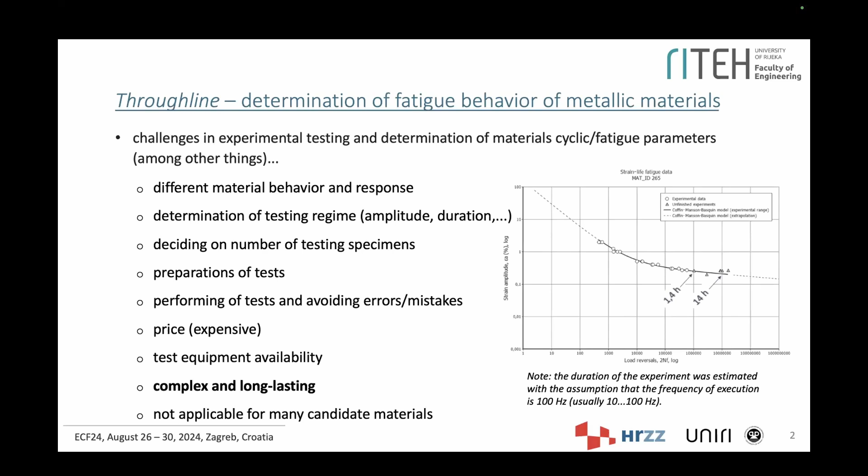So most of you are also familiar with challenges that come with performing experiments. You have to make series of decisions, but even if you do everything properly, cyclic experiments are long-lasting, they are expensive, and often data are not available in early stages of product design. So in the last 6 or 7 decades, estimation methods are being developed constantly. Mostly those are some kind of analytical expressions that try to estimate strain life parameters from monotonic parameters. Nowadays, more and more different kinds of machine learning algorithms are used for the same problem.

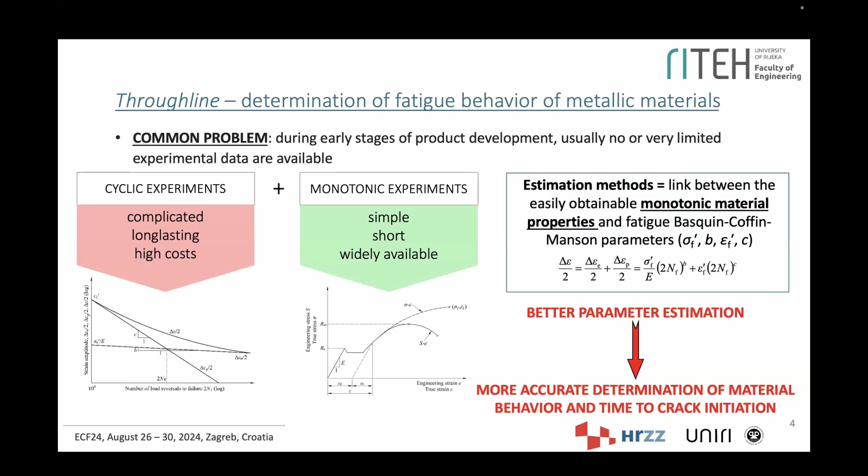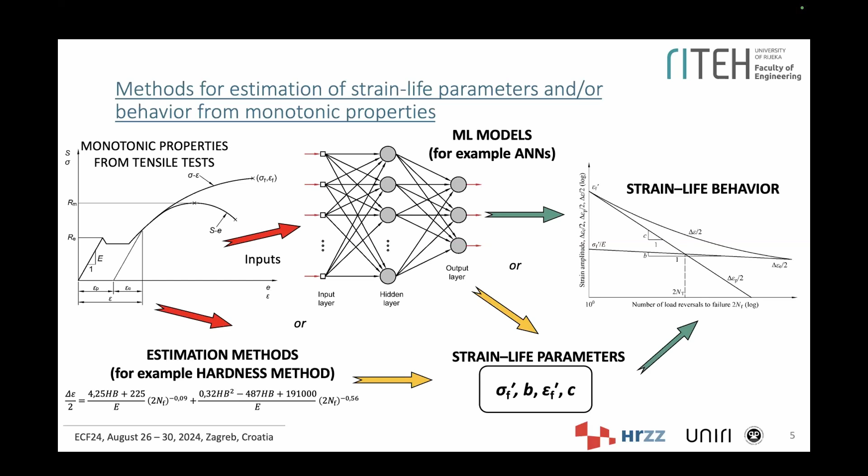So what is basically the goal? To have better parameter estimation and more accurate determination of material behavior and time to crack initiation. What we do, we take monotonic properties from tensile tests. We develop either analytical equations, maybe some of you are familiar with the hardness method proposed by Roessle and Fatemi, or nowadays, as I mentioned, we use a machine learning model and obtain some estimations of strain life parameters. Then we can use that to calculate the strain life behavior. So it doesn't matter the approach, but how we evaluate those methods.

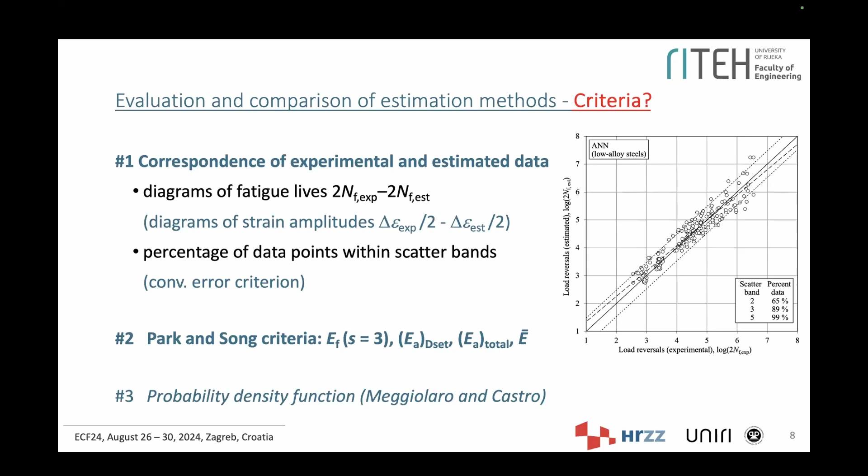So Park and Song in 1995 proposed additional criteria, let's say numerical criteria that address not only the percentage of data that falls within a scatter band of 3, but also try to estimate how well the method estimates, if we evaluate on a certain data set altogether or for a single material. And so those are these two. So you can imagine one is connected to this trend line, this dashed one, and one is connected with single data sets, and then in a certain way it is calculated. They also proposed that an average value of these three criteria is calculated, and then to make some conclusions.

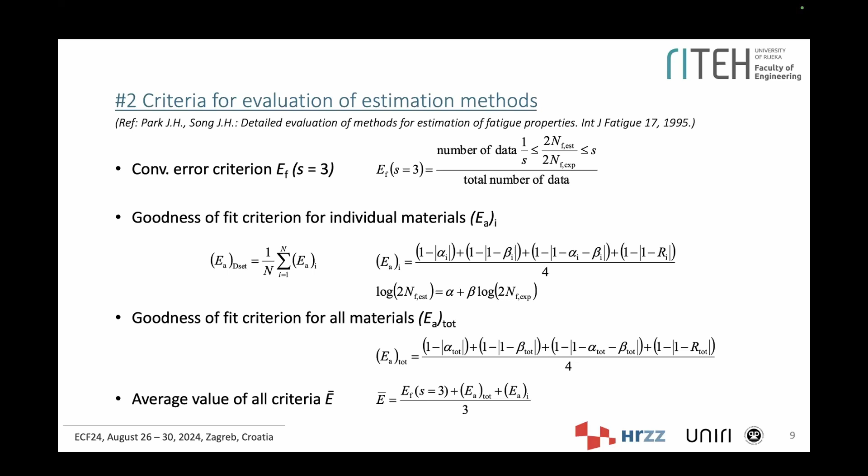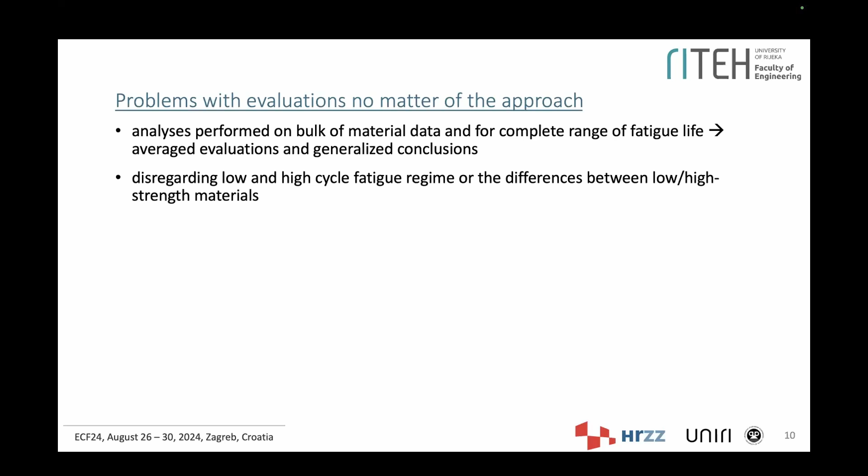So these criteria are more or less used, I would say less, but yet again, we have additional problems with evaluations. Those are commonly done on bulk material data, maybe disregarding certain subgroups of steels or metallic material in general. So everything is put together, steels, aluminum alloys. It's often performed for low cycle and high cycle fatigue regimes together, and maybe some other particularities of certain material groups are disregarded, so high strength materials or low strength materials. This is a problem in general with all evaluations, and there is an additional problem with machine learning based models.

I will focus in this presentation on artificial neural networks because I did that. Because there are two aspects of evaluation. Usually performance of an artificial neural network is evaluated in some kind of way. So we use various statistics like mean relative error or coefficient of correlation, coefficient of determination, and then say, okay, this is good or this is not good.

But the final result, so estimation of strain life behavior, is usually not done. Or if it is done, we also see some scatter plots, and we get a percentage of data that falls within the certain scatter band, and that's it, without these detailed criteria. But as far as I've seen, nobody used Park and Song's criteria for detailed assessment of results that are estimated with machine learning based predicted strain life parameters.

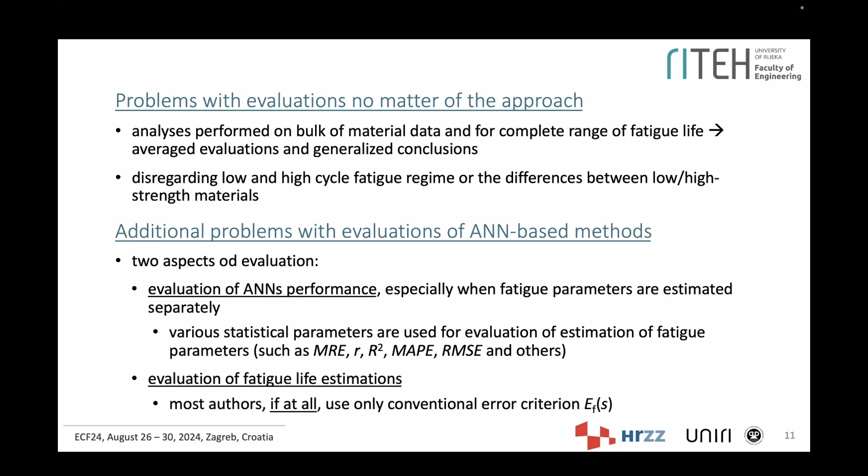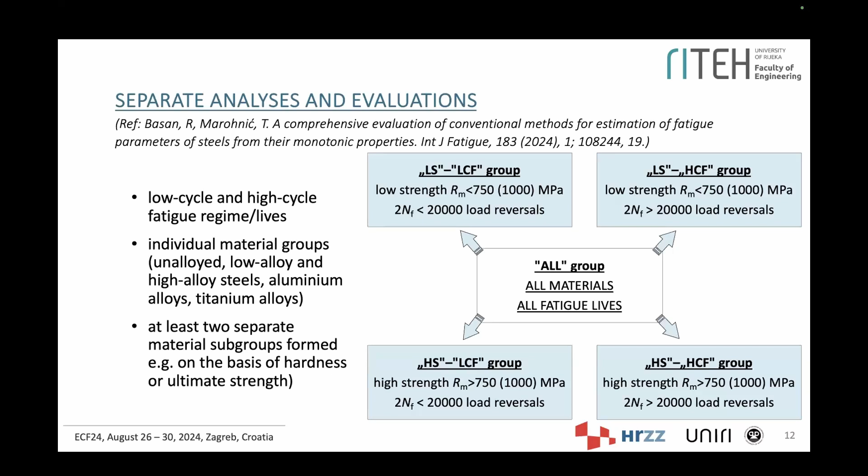So my colleague will tomorrow present results for aluminum and titanium alloys that differ a bit according to division, but the principle is the same. And of course, we treat unalloyed, low alloy, and high alloy steels separately.

Okay. Every time we do evaluations, we always use unseen data. That means those were not used for development of artificial neural networks, but we also wanted to get objective results. So we made sure as much as we could that also these data were not used in development of evaluation methods. So hardness method by Roessle and Fatemi, uniform material law, and those that we chose.

I will show you, because the time is limited, the results for strain life parameters first. So every method takes monotonic properties and calculates in some way. We used artificial neural networks, and now we are in this step. We use the estimated values of strain life parameters. And in these diagrams, you don't have to focus on everything, because there's a lot of things that could be discussed, but maybe just mind these blue bars, because those results represent artificial neural networks.

So what is presented here is the percentage of values for each parameter that deviates up to 10, up to 20, and up to 30% from their experiment-based counterparts. So dark blue bars are for artificial neural networks, and the other colors are for analytical methods that I mentioned. So you see some much better results for certain groups of steels and for certain parameters.

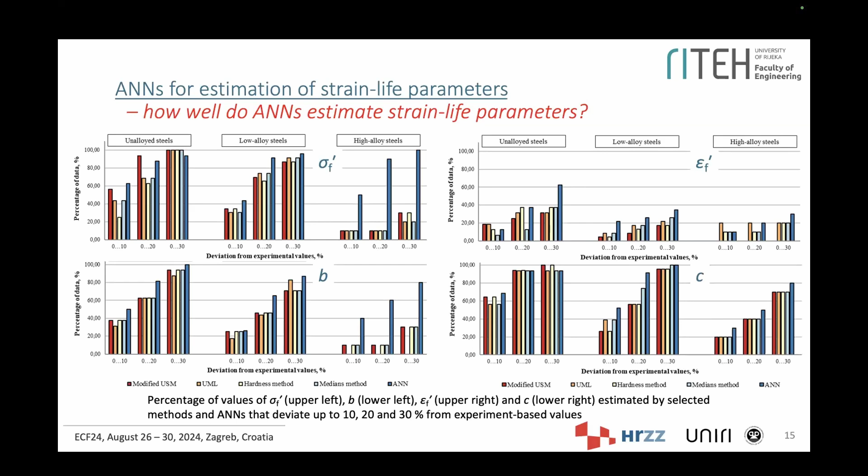It could be discussed, but in this case, we will focus just on low alloy steels, where we observe better estimations. They are not like a revolution, but they are better. Maybe in these deviations up to 30%, we don't see that much improvement, but in these deviations up to 10, up to 20%, we see some improvement, and we want to see how that affects estimation of fatigue lives.

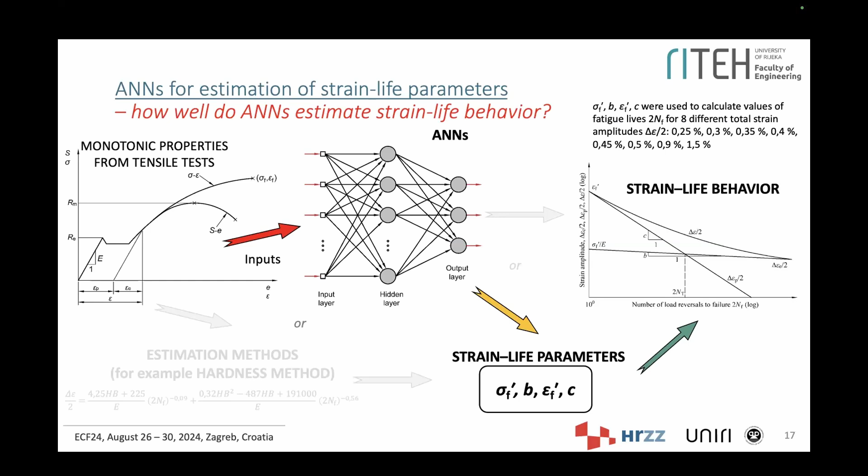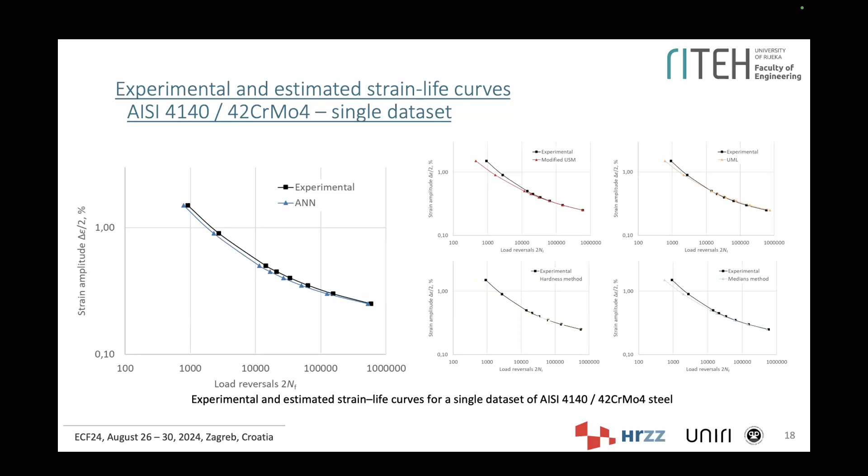Okay. So we use those parameters from artificial neural networks to calculate strain life behavior for 8 different total strain amplitudes. We could plot again these curves. I can present you one material, or 5 materials, and say it's perfect, but I'm saying in advance it's not perfect. When compared to conventional estimation methods, for this material, yeah, it's really good, but we want to see the generalization of the method.

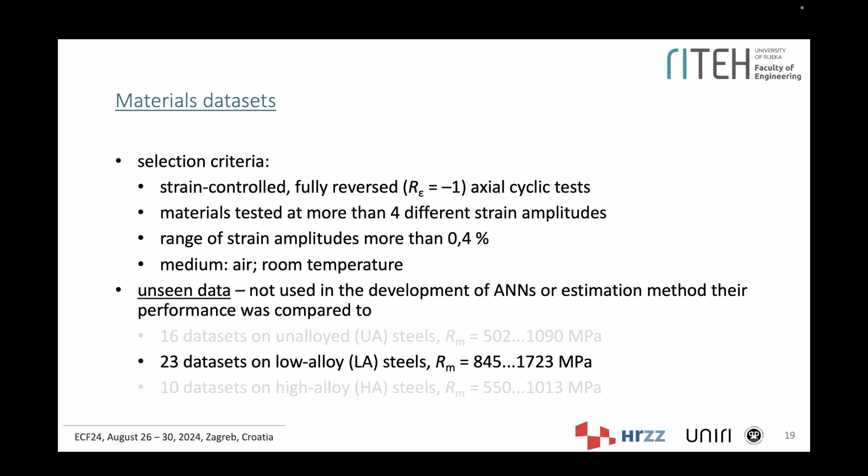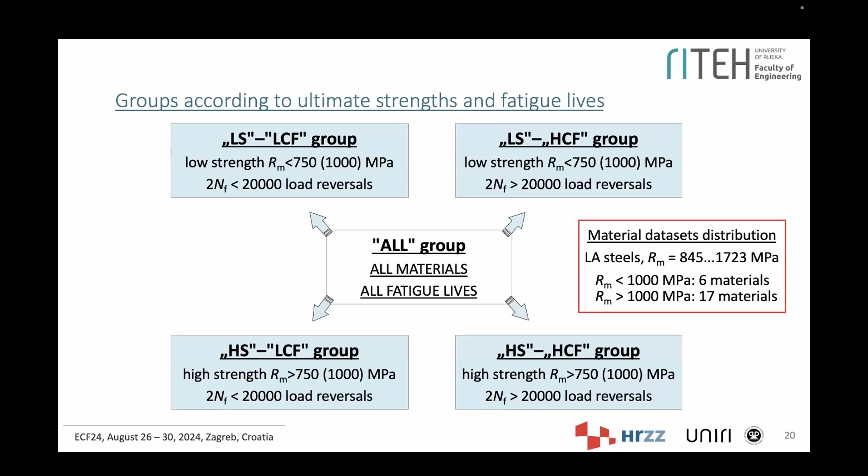Okay, so again, we are focused only on low alloy steels. We had 23 materials. Just to remember that we divided them into low strength and high strength steels. And according to experimental calculated fatigue lives, they are divided into low cycle and high cycle fatigue regimes. Okay, and then we calculate Park and Song's criteria and obtain some numbers. The closer the number is to 1, the better.

Yeah, but it's really difficult from such a table to conclude something, especially if you are not really familiar with the criteria, but let's see just here. So in the first row, you have all data together, and in second to fifth, LS is low strength and low cycle fatigue, and that is the logic. And if we check the percentage of data that falls within scatter band of 3, it's not that bad. It's around 0.8, 0.9, so not so bad.

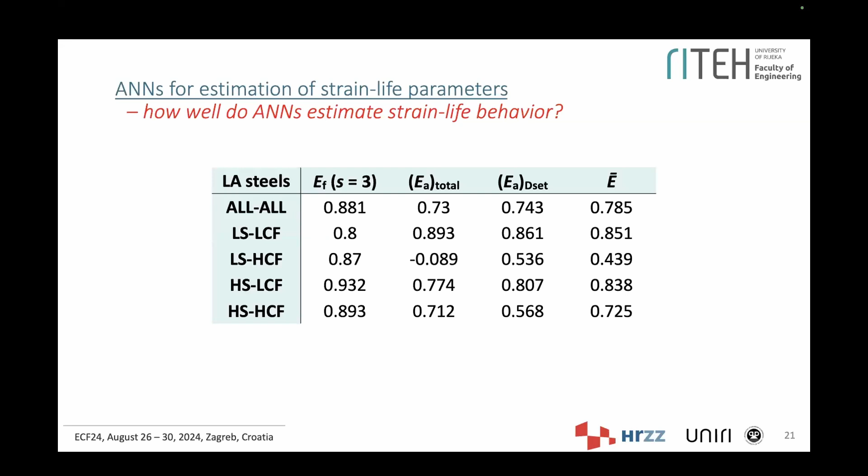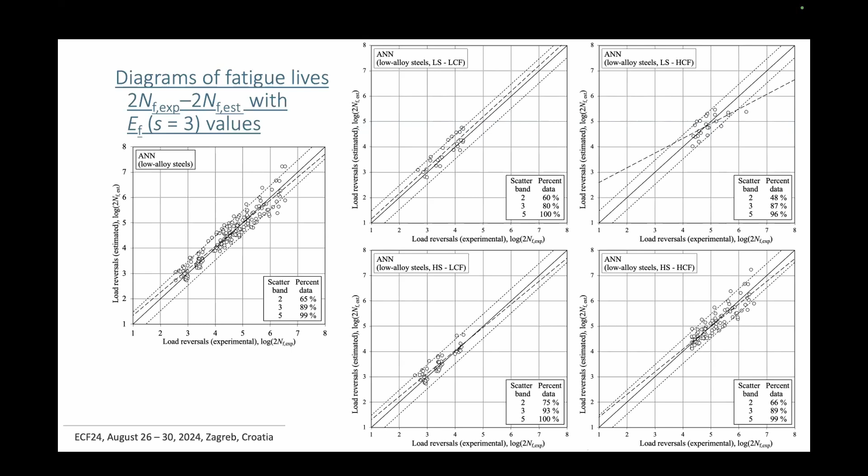And actually most of these points, as we see, fall within that scatter band of 3. Here we have some deviation, because this trend line is inclined. It's not really something we want. It quite differs from the perfect line, let's say. And if we connect that with the table that we saw on the slide before, that is actually the group where we obtained minus for one criterion. And of course, if you have minus in one criterion and you want everything to be as close to +1 as it can be, it will also affect the average value of these 3 criteria.

Okay, so what can we say? Are neural networks good at estimating parameters or not? Neither good nor bad. But I just want to warn you that when we do evaluations, we have to be really careful what we take and how we use it.

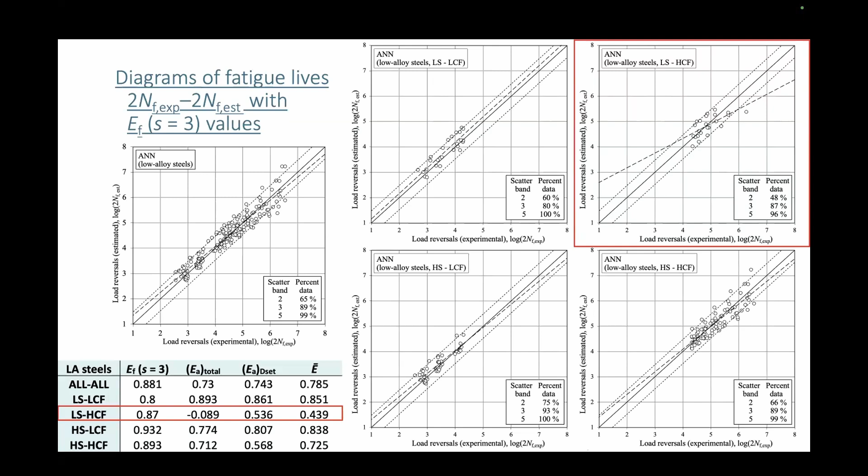It's also interesting to see, for these low strength, high cycle fatigue results, what results we obtained with other methods, analytical equations which are widely used. So I put a table for all steels together, without that data division, and for that particular, let's say, problematic subgroup of data, and compared it to the modified universal slopes method, uniform material law, and hardness method that performs really well. Here we can see artificial neural networks are comparable to some widely used methods, of course for this data set we used, because evaluations always rely heavily on the data we have. And we must mind that we don't extrapolate and everything that goes with that.

But when we check results for low strength, high cycle fatigue, and that criterion where we obtained minus, we see that other methods also don't perform that well. It's better than artificial neural networks, definitely, but also 0.3, 0.4. And when we see this average value, artificial neural networks are again comparable with UML, slightly worse than the modified universal slopes method and hardness method.

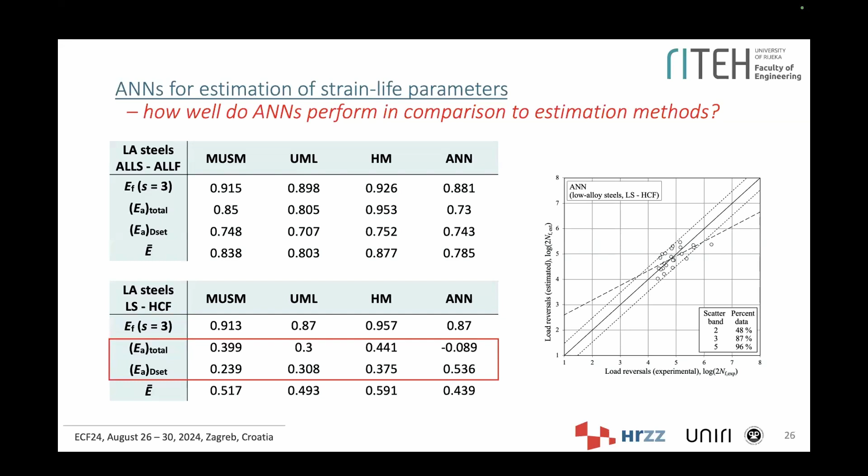What is the point of this presentation? The point is that the methodology for evaluation of these methods, no matter which tool you use, has to be the same. It has to be unified, so you can compare the results to other papers. It is always a problem with artificial neural networks that you usually cannot repeat somebody else's research, and you usually don't have their codes or results, so you can't make a direct comparison to your investigation.

So that is actually the conclusion, that comparability is a must, because for now we can only judge that something looks reasonable enough, and we have to trust the results based on those scatter diagrams, or maybe comparison of experimental and estimated curves.

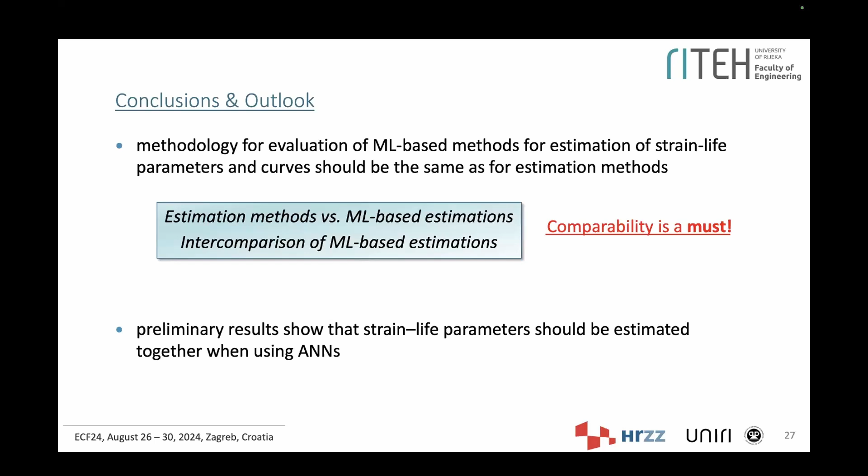We are also always interested in the outlook and how we can improve estimations, and for now we were experimenting with estimating parameters all together, not separately as was done. I didn't go into details because of the limited time. So we think something can be improved if we did estimations for all parameters together.